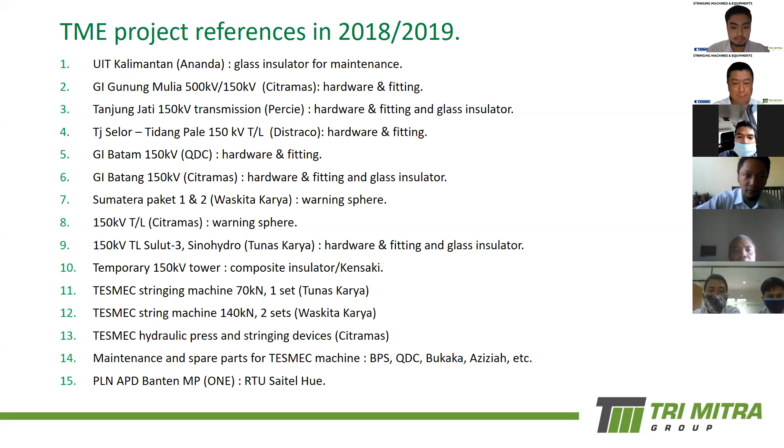Mesin-mesin stringing yang dibeli tahun lalu itu oleh Tunas Karya Ditama untuk tipe kecil, Waskita Karya 2 set untuk pekerjaan di Sumatera, di Citramas, dan perawatan-perawatan mesin. Jadi kalau dilihat di sini sudah cukup banyak yang sudah kita kerjakan selama ini. Terima kasih atas dukungan Bapak Ibu sekalian, semoga di tahun depan kita semakin bisa mendukung proyek-proyek Bapak dan Ibu sekalian.

Untuk mengingatkan offer-offer yang ada di kami yang kami wakili, untuk peralatan atau produk-produk transmisi, hardware fitting, dan insulator, kita memiliki Dervaux untuk hardware fitting, dari mulai tension string set, suspension string set, damper, spacer, dan lain-lain. Dan juga warning sphere dan warning light yang dibutuhkan untuk area-area berdekatan dengan penerbangan.

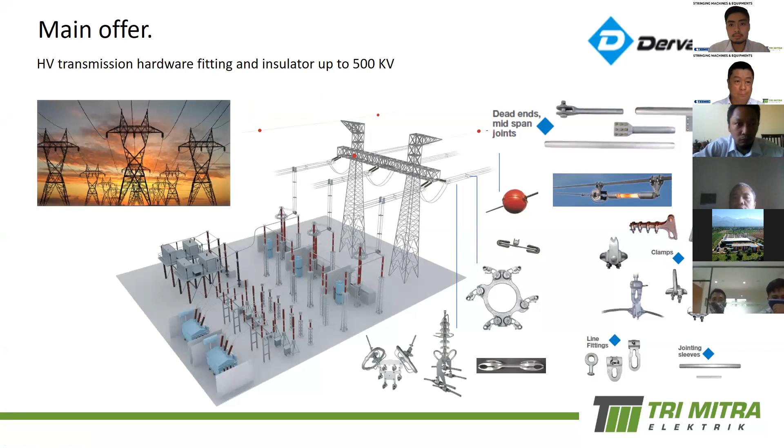Untuk substation gardu induk, kita juga memiliki dari Sicame Group dengan merek SBI. Ini segala jenis konektor yang diperlukan untuk gardu induk, diproduksi oleh kami di beberapa plant kami di Spanyol, di India, dan di tempat lain. Produk yang kami miliki itu lengkap sekali, sampai 500 kV.

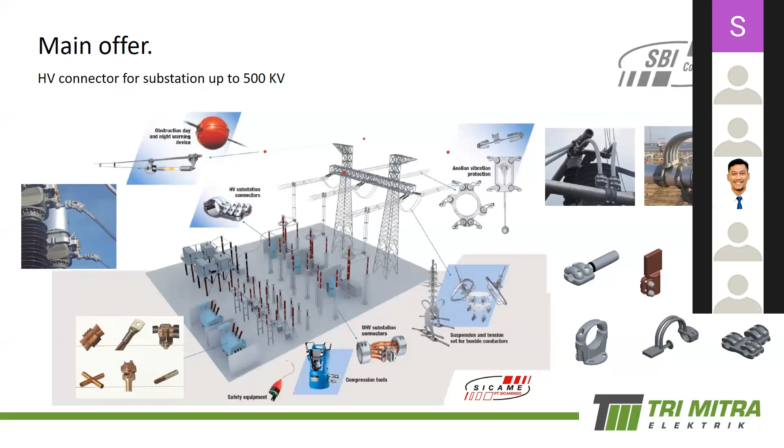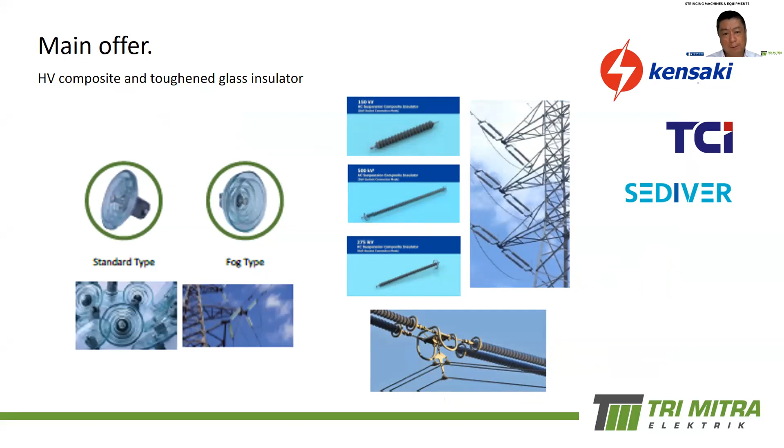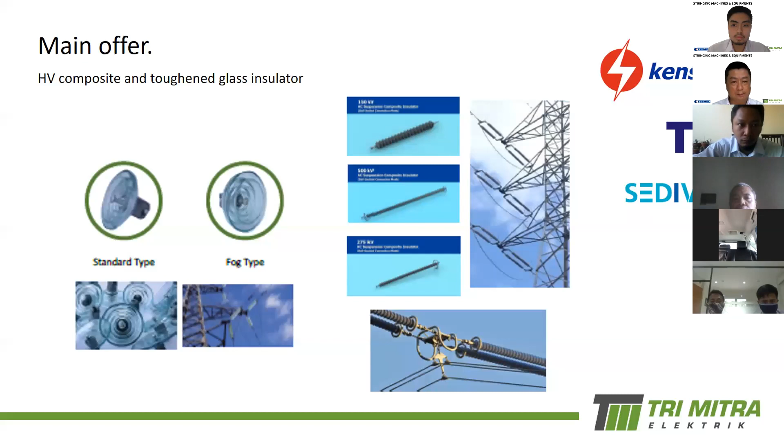Untuk insulator, kami memiliki semua teknologi, seperti Bapak Ibu ketahui ada 3 macam teknologi insulator, dari mulai keramik, toughened glass, dan komposit atau polimer insulator. Kita memiliki ketiga-tiganya dari merek-merek terpercaya. Untuk polimer atau komposit itu dari Kensaki, produksi Indonesia sepenuhnya. Untuk keramik kita memiliki TCI, dan untuk toughened glass itu dari Sediver, Prancis. Jadi lengkap sekali, apapun teknologi yang dibutuhkan, kami bisa mendukung proyek Bapak dan Ibu sekalian.

Pada hari ini kita akan dibawakan oleh tim dari TESMEC Italia langsung, offer yang lengkap untuk mesin stringing, dari puller tensioner ataupun gabungan puller dan tensioner, baik dengan teknologi yang paling mutakhir 4.0, dan juga peralatan-peralatan bantu seperti tirfor, come-along, pulling rope, mesin press hidrolik, dan bermacam-macam alat-alat lainnya. Nanti Bapak dan Ibu bisa juga download katalog lengkap kami di website kami.

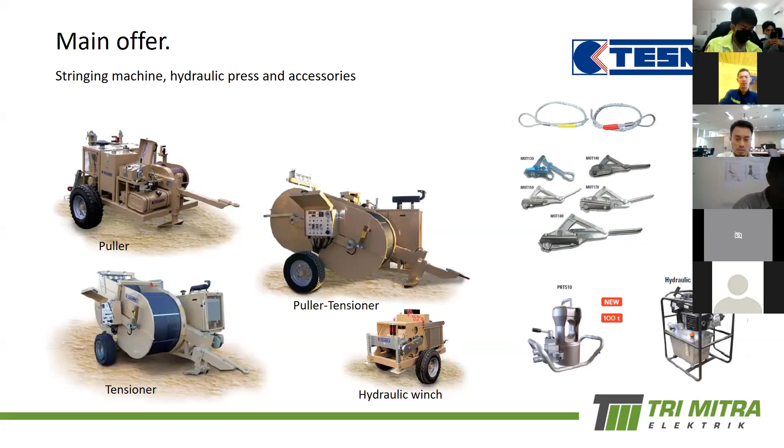Dan ini yang terakhir adalah untuk distribution automation untuk 20 kV. Ini untuk kebutuhan di gardu-gardu distribusi, dari mulai fault indicator, remote terminal unit yang sudah dipakai di beberapa tempat di APD, dari tipe-tipe kami Talus T300, Saitel, DP, dan DR. Ini produk dari Schneider Electric.

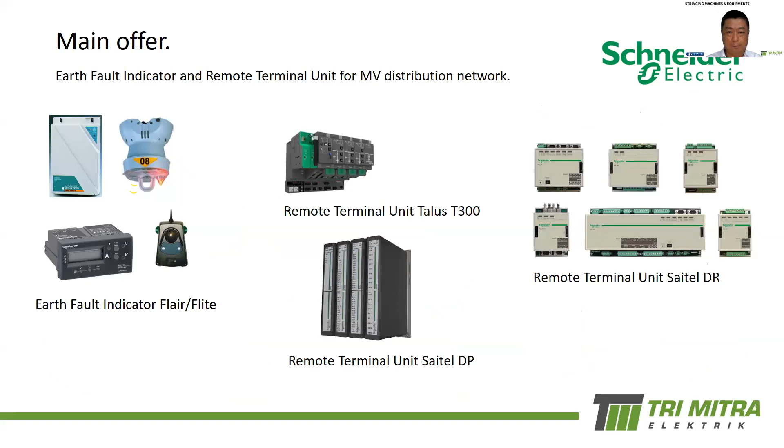Demikian penjelasan sekilas mengenai Trimitra Electric, apa produk yang kami wakili, yang kami representasikan, dan kepada siapa mungkin Bapak dan Ibu bisa berhubungan dengan tim kami, baik tim sales maupun tim technical. Kalau ada informasi yang diperlukan bisa mengunjungi website kami www.trimitraelectric.com. Demikian penjelasan dari saya.

Mungkin kesempatan berikutnya kita berikan kepada rekan saya Amos dari TESMEC Italia. Silakan Pak Alvin.

Terima kasih Pak Rianto. Jadi yang akan mulai ini Amos Carrara, sales manager, sales area manager, dan juga Mr. Gianluca, yaitu sales director dari TESMEC langsung. Untuk mempersingkat, saya perkenalkan Amos.

Halo Amos, are you there? Yes, I am, Alvin. Good afternoon to all of you. It's a big pleasure for us to join you in this very interesting webinar, I hope. Due to the circumstances, I cannot be there because of the restriction of COVID, which is an experience that you're having as well. But I think that thanks to this event organized by our partner from Trimitra, we are able to give you an update of all our solutions from a stringing equipment point of view.

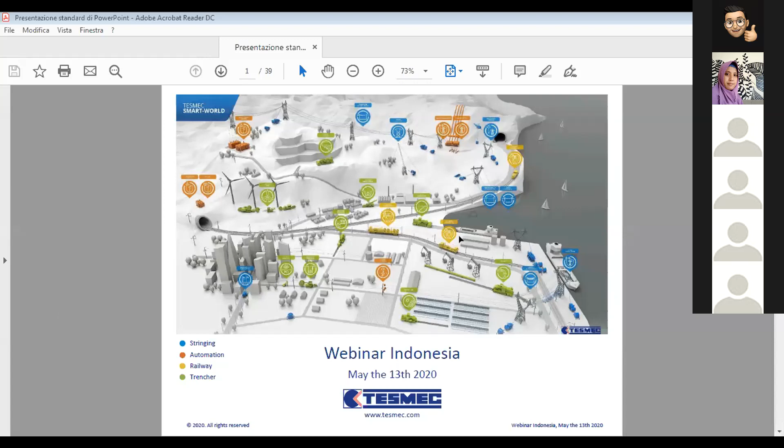We are a company based in Italy, existing for more than 65 years. And we are increasingly becoming a solution provider rather than just a manufacturer of products. Okay, I will go fast.

We have 4 business units. Stringing is one of the 4, and the historical business unit of the company. We have the railway division that is fast growing in the last few years, where we manufacture machines, equipment, and solutions for catenary installation and maintenance. We also have an automation division, a small division for grid management devices, for telecommunication and so on. And the trencher division, which is at this stage our biggest division in terms of turnover.

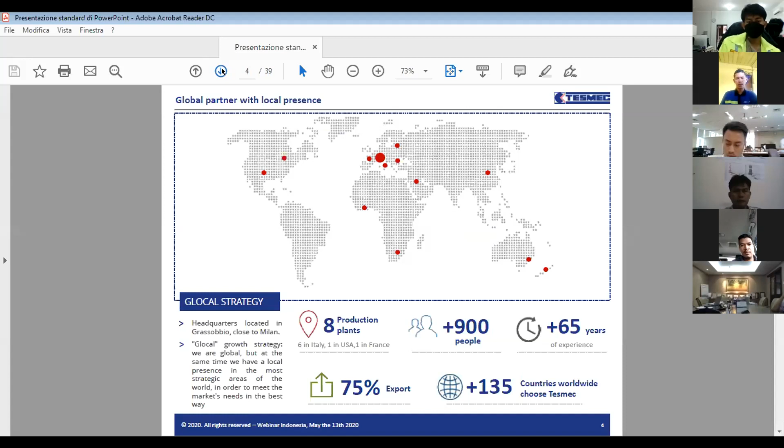We have 8 production plants all over the world, even if mainly in Italy. We have 5 production plants in Italy, maybe 6, and 1 in USA, 1 in France. We are close to 1,000 people nowadays, and as you can see from these numbers, our focus is mainly overseas, on export.

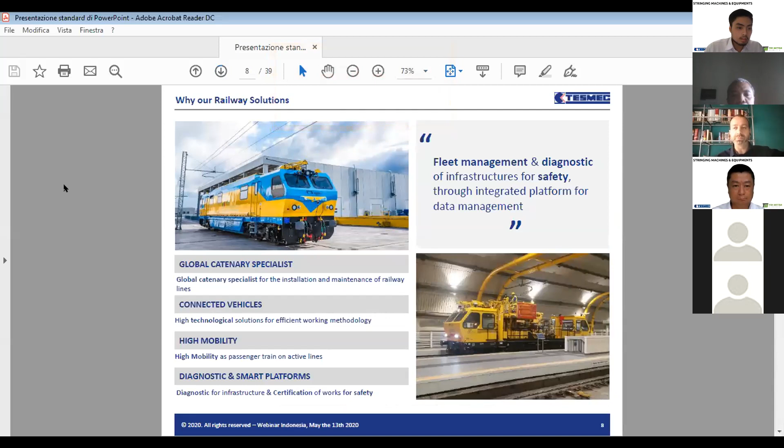Can you see my desktop? Can you follow? Okay, yes.

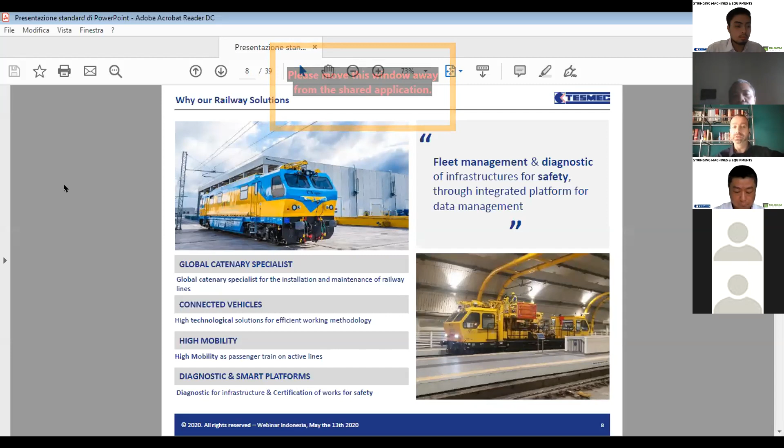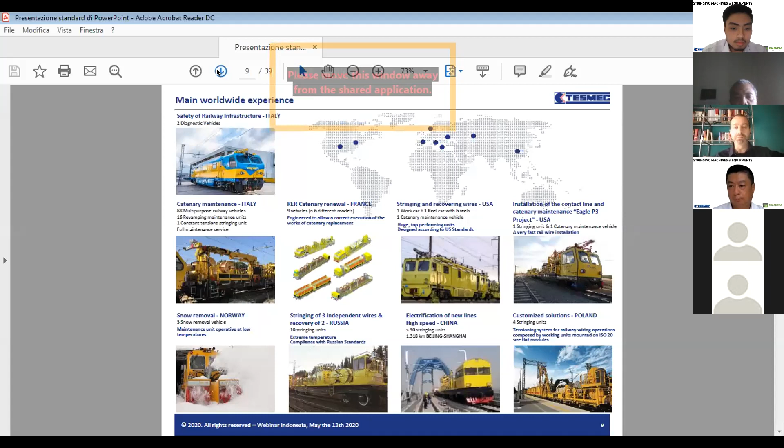The railway solution is very important, very much related to stringing, because it started with stringing equipment for the railway. It is born from the same technology of the tensioners, the puller tensioners, like for overhead lines, also for the railway. But from there, historically part of our manufacture, since 7-8 years now we have a big range of equipment with very different machinery for maintenance, for diagnostics, and for many other activities than only stringing. You see there are some examples of equipment and main projects in several countries.

The trenchers. The trencher is a range of machines that we produce here in Italy and in USA. We can say there is a main production of hard rock trenching equipment that we have historically, merged with a company called Marais from France, where the orange color machines, by the way, are more let's say urban, for cable and fiber installation, and where we also have service ability in a few countries where we give this technology on a rental basis.

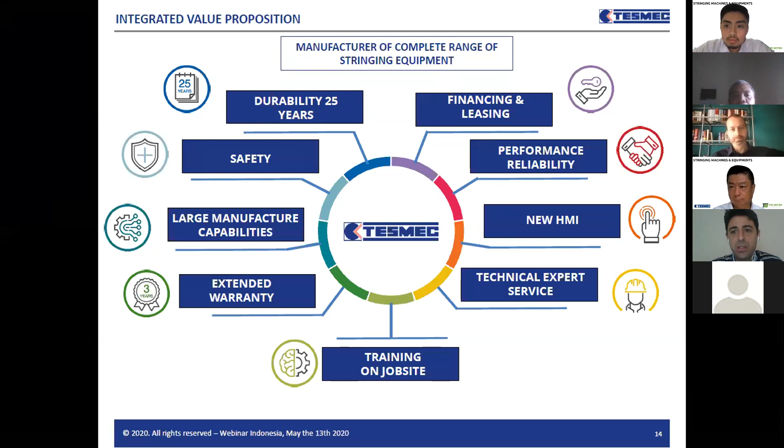So that was a revolution. Tesmec was the first one taking care of that. We got the patent, we got the leadership, and thanks to that, we then developed our experience, making the machines more and more sophisticated and performing. So you see moving from the pure mechanical, then to hydraulic, then starting from the 2000s we put in electronic components, making that step by step more and more technological, until now we've gotten to what we call machines 4.0, which is the last step of our evolution. We'll give some information about that in the next slide.

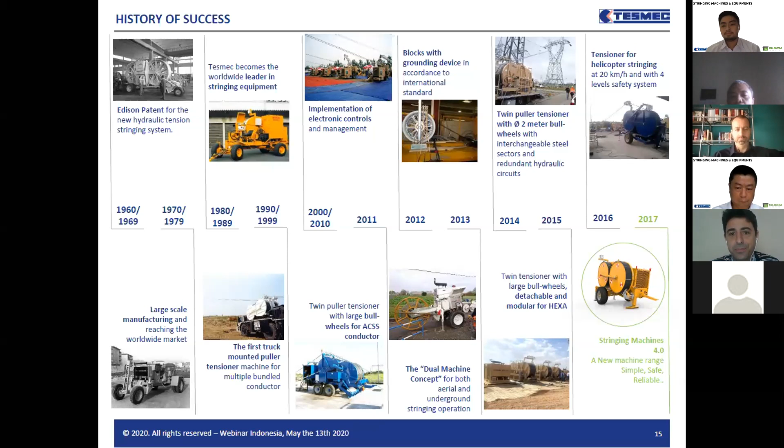All our machines and equipment take into consideration the guidelines, prescriptions, and standards which are given by the major working groups worldwide.

Probably the most important one, I would say the most important one, is the IEC, which stands for International Electrotechnical Commission. The working group specifically dealing with stringing equipment is the 61328. We have the great luck and pride to have our chief engineer being part of the working table defining all the prescriptions and standards, so we are very aware of the technical specifications required to be in compliance with this.

I take the occasion now to introduce Mr. Alberto Oscar, who is our chief engineer, who can give some quick points about the key factors which make the machines compliant with such prescriptions. Alberto, would you like to give two or three quick references?

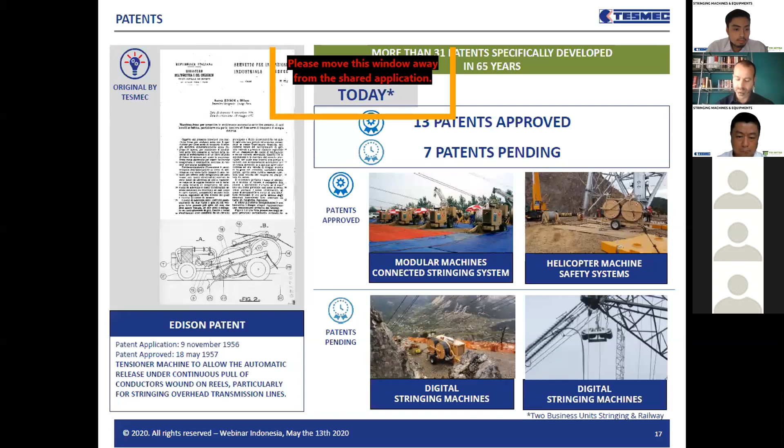In particular, Tesmec introduced the modular machine concept, with an approved patent. Tesmec also introduced to the market the helicopter machine, a tensioner that can work with a helicopter acting as a puller at very high speed, up to 20 kilometers per hour, for example. Tesmec also has some patents pending, for example on the new concept of the roller, the pivoting array block featured in the new catalog, and on the digital stringing machine. So Tesmec is very involved in research and development, and in registering and protecting know-how all over the world.

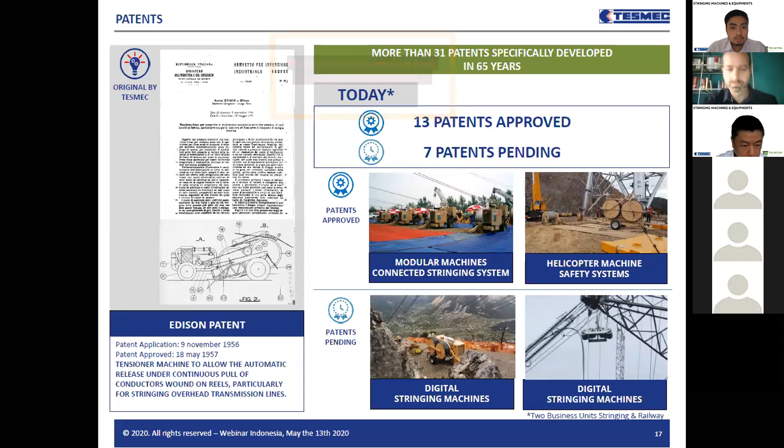Okay, during the next slides there will be other technical points, so I will step in when needed. Yeah, Alberto can jump in anytime he deems fine for further explanation.

If you want a bigger vision of this catalog, our friends from Trimitra can provide it on soft copy and on paper copy as well.

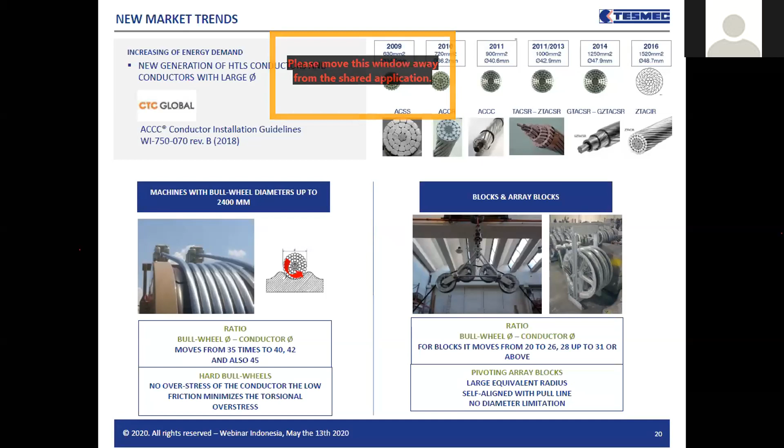Thank you, Amos. Just talking about CTC, then we'll move quickly. CTC has in their range a conductor called the Monte Carlo, which is 21.78 millimeters, if I'm not wrong, with the carbon core Alberto mentioned. The requirement from CTC is to have the bull wheel diameter 70 times bigger than the carbon core. I don't remember the specific dimension of the core itself, but in the end, the minimum bull wheel diameter came out to 1.78 meters. This is just an example to show that the world is probably heading that way - new conductors are coming and the machines and equipment must follow, and we are ready for that.

We know that Indonesia has already had some experience with ACCC conductors. We are ready for that. So should this become the way forward even in Indonesia, we have the machines, rollers, gripping clamps, and sock presses. We are aware of all the specifications required to satisfy these needs.

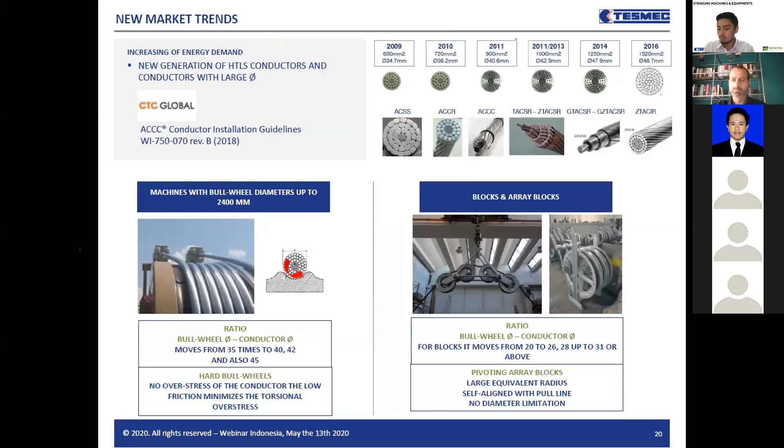But still you had some requirements for the reconductoring, because I'm aware that the PLN is in any case replacing some old conductors with new ones. So this could be a great solution to cut dramatically the time needed to finish the job. According to our simulation and according to the partnership we had with National Grid, which is the PLN in UK, we can say the time saving can be up to 40% compared to the traditional solution.

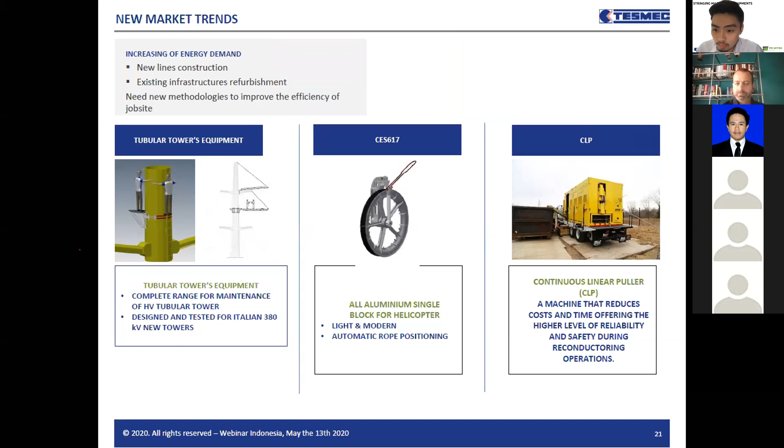The most important benefit of the continuous linear puller compared to a traditional puller tensioner is that when a mid-span joint arrives in front of the machine, the CLP can manage it directly and cut it with the cutting module, while in a traditional puller tensioner the mid-span joint has to be cut and removed in front of the machine—an operation that requires anchoring the conductor, cutting it, removing it, installing mesh joints, passing over the conductor, removing the mesh joints again, recovering them, and restarting the operation. So the 40% gain in reconductoring time is basically related to the fact that every mid-span joint, repairing joint, or dead anchor tower bypass that arrives in front of the CLP can be managed without a stop.

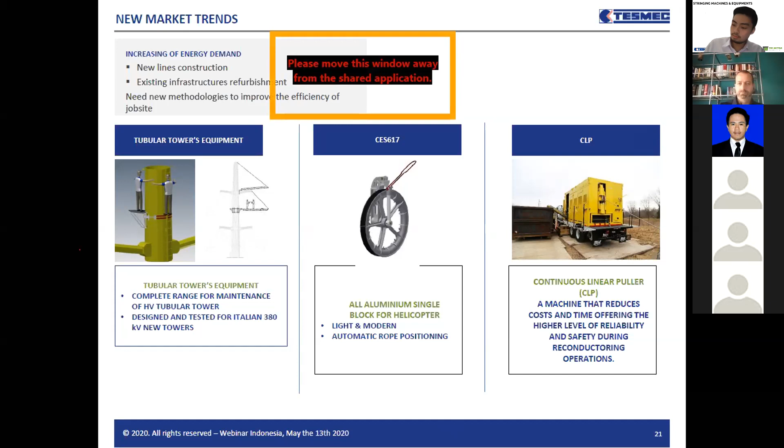Yes. What is this slide about?

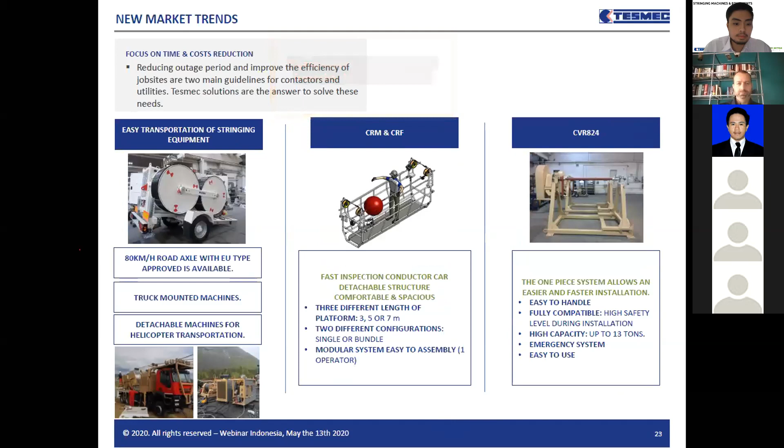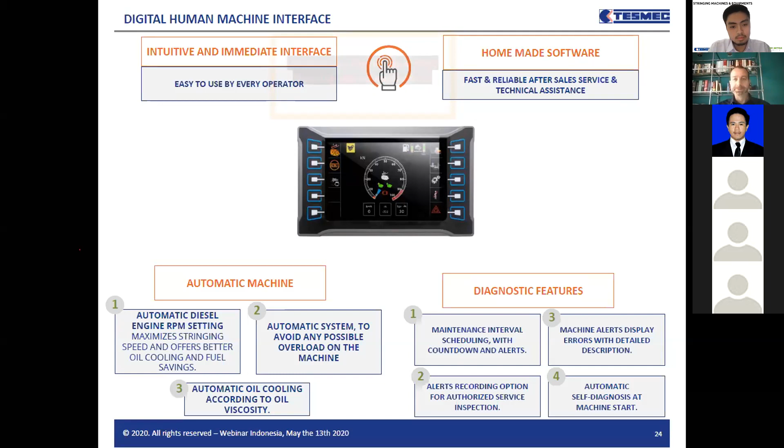It is extremely simple to use, and the machine has a lot of automatic systems to avoid mistakes, to increase safety, and also to have a full diagnostic of the machine itself on board, and also remotely if required, by a system that we can install on the machines.

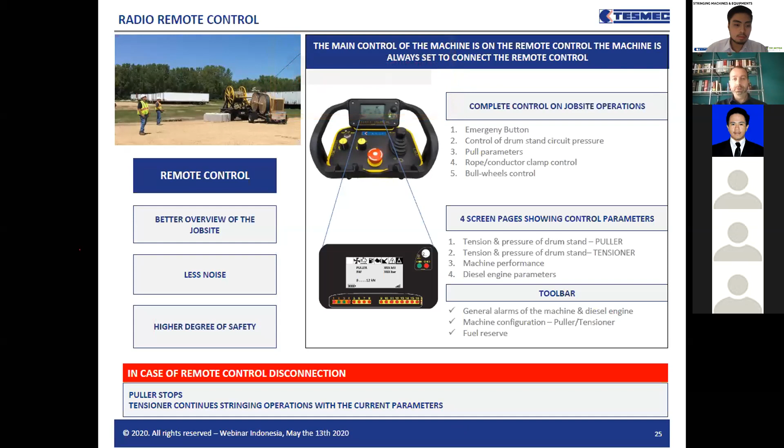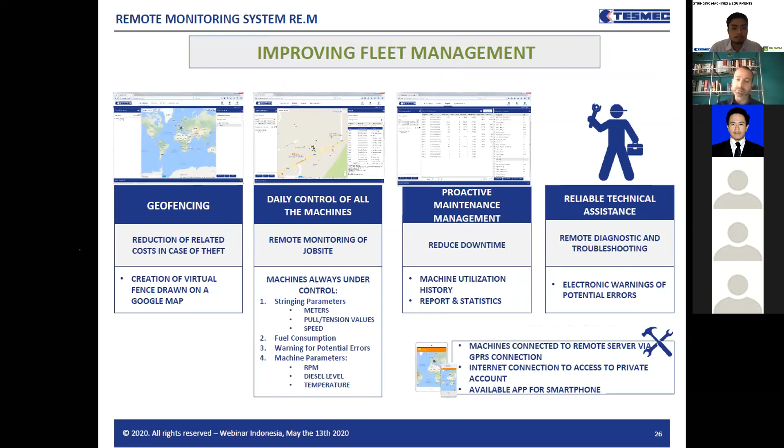The fleet management is what we call the remote monitoring system. It's a system on board the machine that, with GPRS, is able to gather all the information from the machine—stringing information, data—and send it to a cloud accessible by the service or by the customer, the owner of the machine, who can access all this information: geolocalization of the machine, control of the machine, maintenance, and proactive maintenance.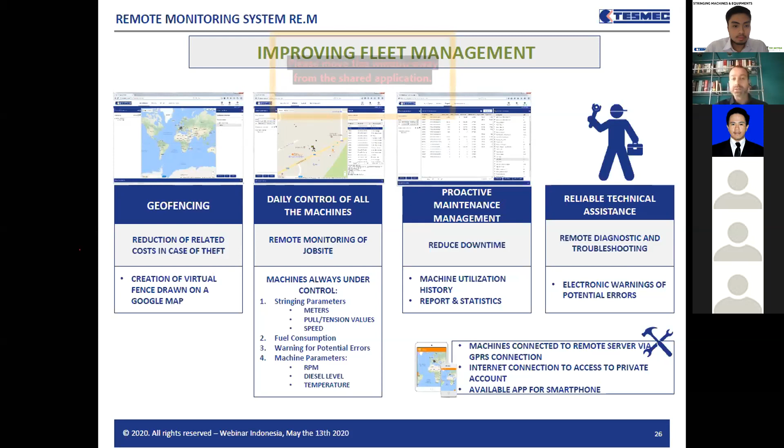It's also a very reliable service for the machine, where we can predict if there could be a problem on a machine to avoid stops on the job site. So this is a new way of managing the equipment and the fleet, in case a company has many machines. This system can also give weekly reporting, for example, of what the machine has done. So it's really a much more modern way to manage this equipment.

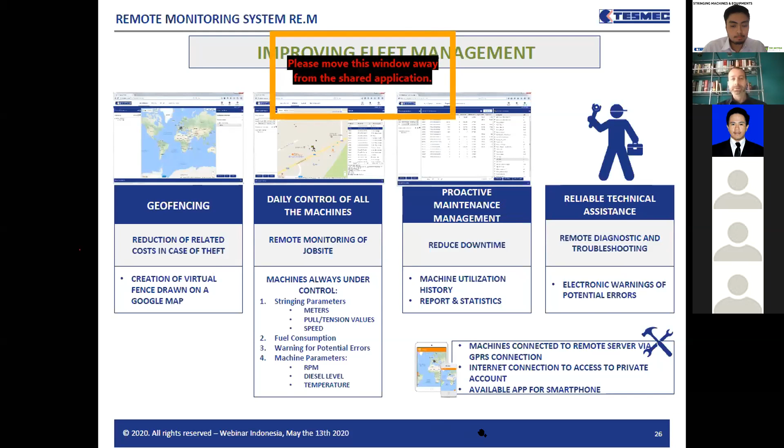Yes, Gianluca, we can say it is a revolution basically, because it is providing a more safe approach. So the new system is able to guide the operator in a much better way, minimizing the risk of any wrong operation being taken. It is providing more information, but more than that, it is providing a different way to show the information, making it clearer so operators, project managers and people know in advance what is happening, thanks to remote monitoring. With remote monitoring, you can see everywhere you are with a laptop, smartphone or tablet what is happening, provided there is coverage with the signal. So we can say it is a really big revolution in the approach to fleet management.

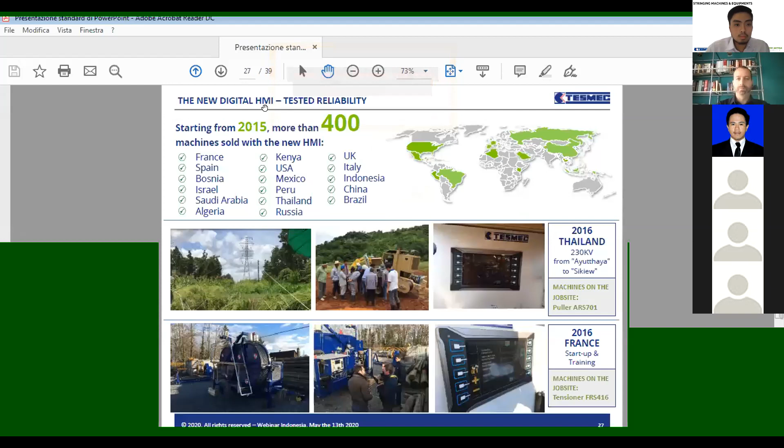We already sold hundreds of these kinds of machines everywhere, in Indonesia as well. It is becoming more and more required. Of course we still have the standard range, so we are not killing the previous machines, which are still available, but the new machines are becoming more and more a standard. You see here in the slide a few examples of the countries we sold these machines to.

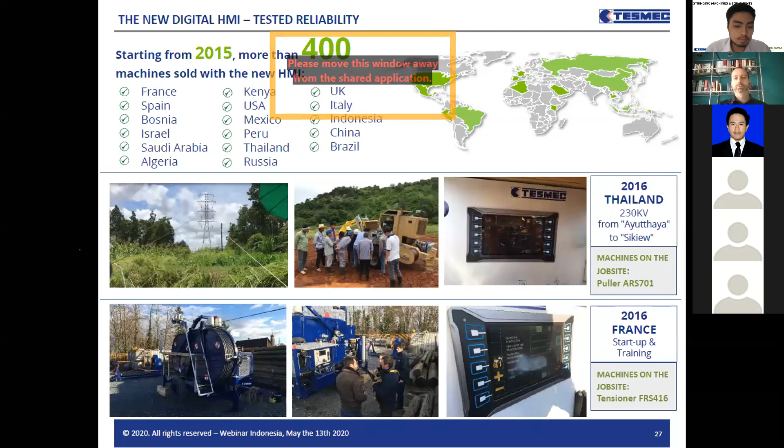We started in 2015 with pilot projects, Thailand and France, a few of them. We saw the results, which were very good. The reliability was excellent. The panel is not touch screen, because touch screen is not fully reliable. So at the end of the day we chose to go with a plastic button, high resistance one, as we saw that the touch screen was not, at that time, fully compliant with the humidity, the dust, etc. So we push on that, and we believe this year it will become the standard in the very near future.

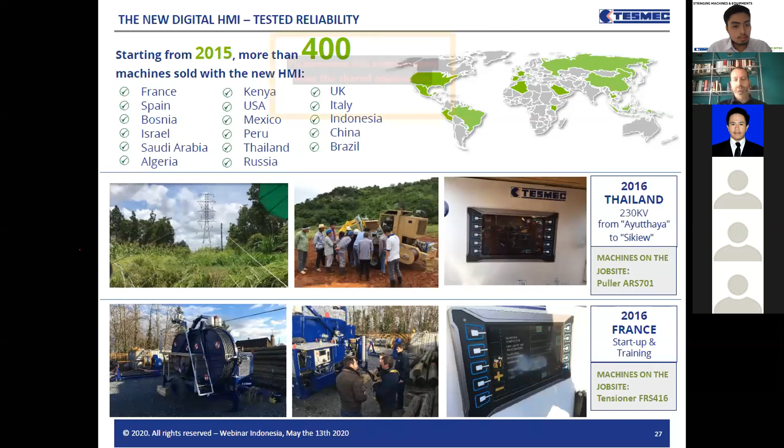Okay, I think we can go quickly here in these slides. After sale, this slide is about our partnerships, also all related to the R&D that we already gave some information about, what we do with technical committees like IEC and universities and so on. So I would go fast here.

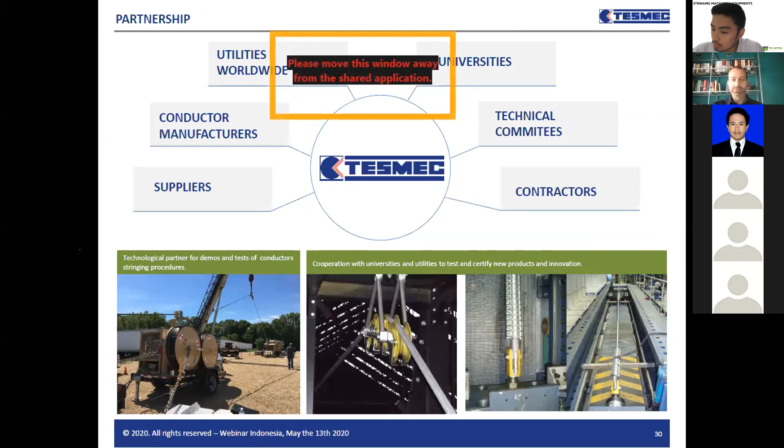Some experience also here, many experiences all over the world, because we are selling equipment in more than 100 countries. So of course we get information and feedback from very different countries and different conditions, and this is also a strength for us to design equipment that is able to work in any kind of condition.

For that reason, we have started testing this new 4.0 technology for 5 years, because we want to be 100% sure of the reliability of this system. We cannot put something in the market without knowing that maybe after 6 months we'll start having problems. So this is our mentality. We have tested this equipment in all different conditions to be sure it was extremely strong.

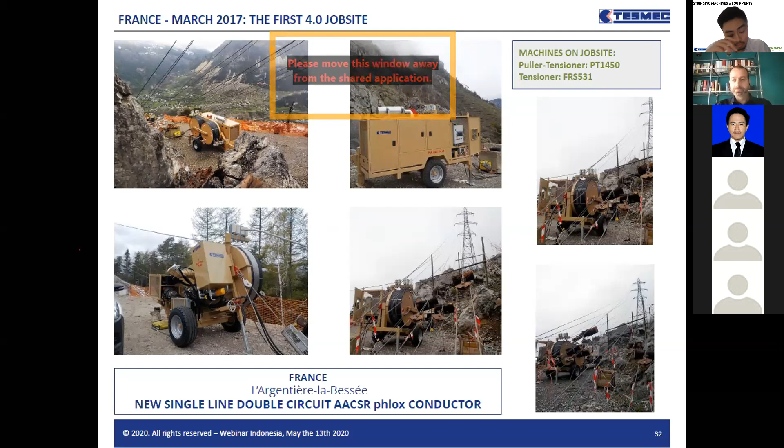Gianluca, maybe it is good to say that in our statistics, we see that our machines normally last 25 years. In many situations I saw machines much longer than that. I remember with our friends from Dalekovod in Croatia, they still have machines coming from the end of the 60s, but it is not so unusual to see machines still working from the 70s. But okay, let's take 25 years.

Our new 4.0 machines surely will not suffer any degradation of this number, because the components are still coming from the same technology as our previous machines. So the big difference of these new machines is just how the information is provided. There is more information because there are more gauges, more data acquisition, but the real revolution is how the information is provided. And this is not suffering any critics, I mean no sensitive point in addition to what we saw so far. So please don't connect this 4.0 concept to a more critical way of reliability or durability, because this will have exactly the same performance as our standard machine.

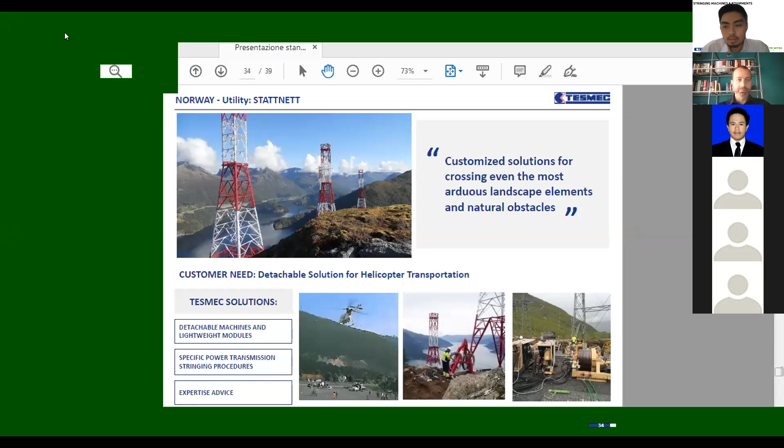Just to be a little bit more detailed, in the right bottom side you can see a 16-ton puller made basically of 5 different parts that can be transported by helicopter. The 2 bull wheels can be transported separately, so they can be easily dismounted. The base frame and the power pack are divided into parts. Everything can be reassembled using just the helicopter as a sky crane, a flying crane. You don't need any crane on site to do this operation.

We have 2 more slides before we get into the Q&A. This is another project with our utility here in Italy, but I know we are very late, so we can go directly to the Q&A if you want. I believe just two free slides about Indonesia.

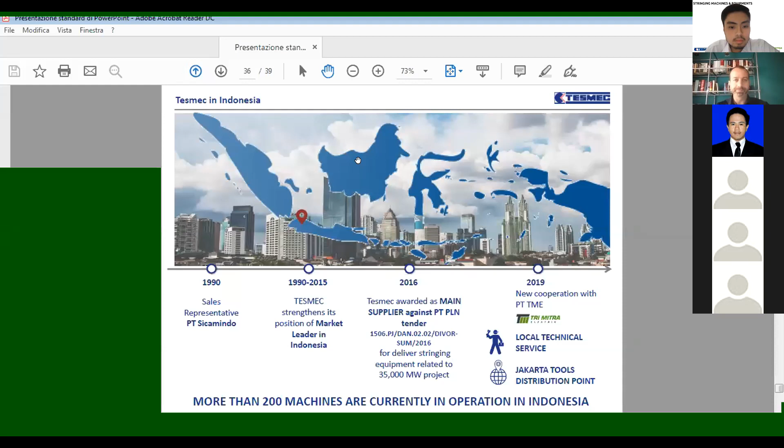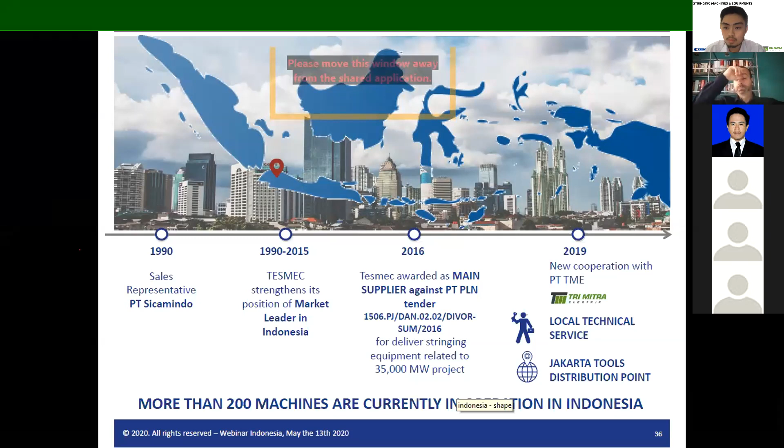Go back to the previous slide showing the green screen. This is the history of TESMEC in Indonesia. We've been there for a very long time. We start here in the line with 1990, but with our machines we were there even before - in the 70s and 80s, when contractors were mostly foreign ones, like ABB, Siemens, whatever. They brought our machines there.

1990 is the year where the market opened to local contractors - for example Balfour Beatty, Sakti Indonesia at that time, Bukaka at that time, and slowly many others came. Starting from that point, as TESMEC we jumped there with our local representative, who for a very long time was Sicamindo, Mr. Sukanta Sutardi - I'm sure you all know him. Thanks to his support and our effort, we reinforced our leadership in Indonesia for a long time.

We got the peak of performance thanks to the PLN project, part of the 35,000 megawatt acceleration project. PLN purchased a big quantity of stringing equipment in November 2016. As TESMEC, we provided 25 sets out of the 40 they purchased, which was a very big honor for us. Thanks to that, our presence in Indonesia is even stronger. At the moment we have around 200 machines currently in operation over there.

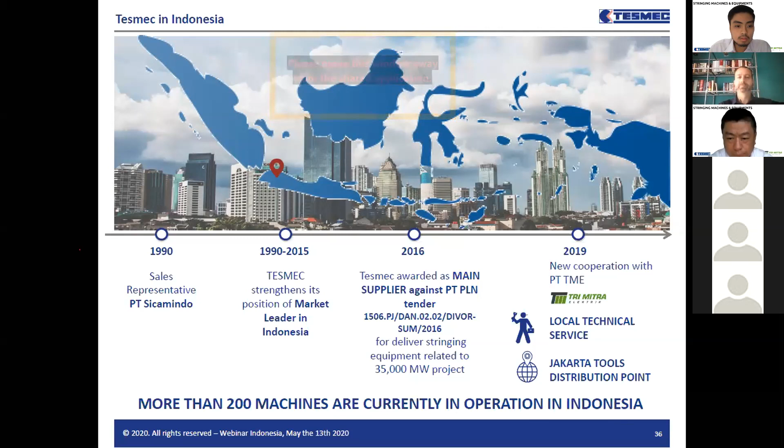In 2019, with great pleasure, we started our cooperation with our friends from Trimitra, with Pak Rianto and Pak Albin, when our friend Pak Sukanta decided to retire. Thanks to him for his good cooperation. Now, thanks to what we did so far, we are much open and very ready to face all new challenges from Indonesia, which is a big market, a booming one. You are building networks everywhere.

Next slide please. Thanks to the PLN experience, we showed our capability to provide a big quantity of machines and equipment. You see here a few pictures from that experience, of machines and pulleys. It was 25 sets, each with 160 pulleys, and each set had 40 or 50 kilometers of pulling rope. We were able to satisfy PLN's very challenging requirement to have machines and goods delivered in 210 days, basically 7 months. We were able to cut the delivery time by 50%.

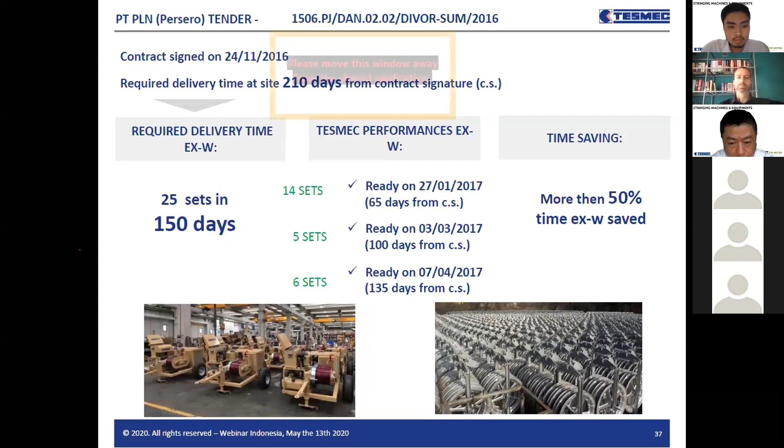So we gave proof of our capability to satisfy these big inquiries in very short time, thanks to our manufacturing department, which is a really huge one, with 8 manufacturing facilities of our group worldwide.

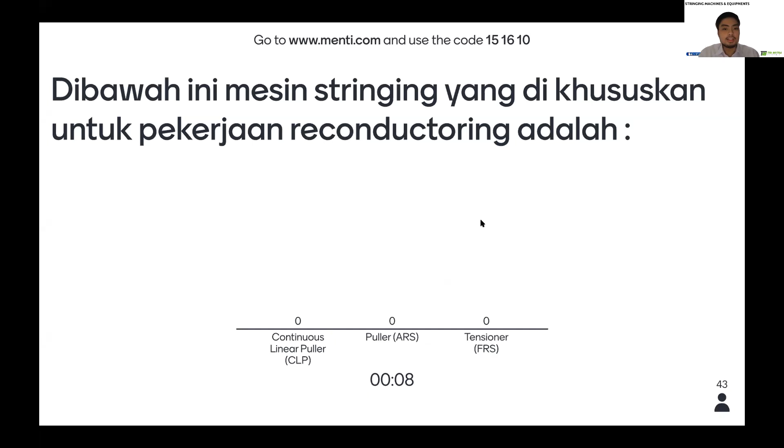Jawaban yang benar adalah continuous linear puller. Itu dikhususkan hanya untuk reconductoring, ada 4 mesin dijadikan satu. Jadi konduktor lama ditarik, kemudian langsung nge-string konduktor baru sekalian memotong.

Ada misalnya mid-span joint-nya dan lain-lain, sekaligus di dalam mesin linear puller. Kita lihat leaderboard, nomor 1, Pak Murdiono. Ini semua bedanya cuma 10 poin, nggak nyampe. Masih bisa dikejar semua ini, 5 pertama.

Pertanyaan berikutnya adalah, di bawah ini yang terdapat pada teknologi 4.0 di digital stringing machine adalah human machine interface, remote control unit, GPS system, atau semua benar. Tadi saya juga sudah menjelaskan mengenai 4.0, apa saja fitur-fiturnya di mesin baru, mesin stringing baru dari TESMEC.

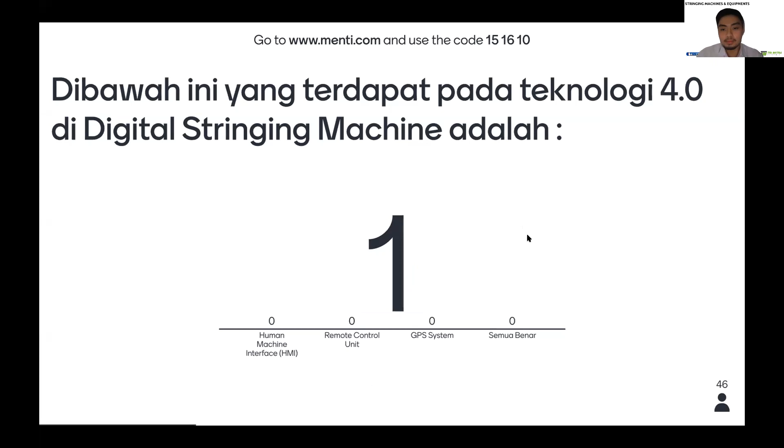20 detik lagi, kita akan melanjutkan ke pertanyaan berikutnya. Ingat, ini poinnya yang menjawab terbenar dan tercepat yang akan mendapatkan skor lebih banyak. Benar, semua ada di dalam mesin 4.0, GPS maupun remote control atau HMI semua ada itu di 4.0.

Nomor 1 Pak Arya. Wah, Pak Arya nomor 1. Tapi ini cuma bedanya 10-20. Masih bisa dalam pertanyaan berikutnya. Masih bisa dikejar.

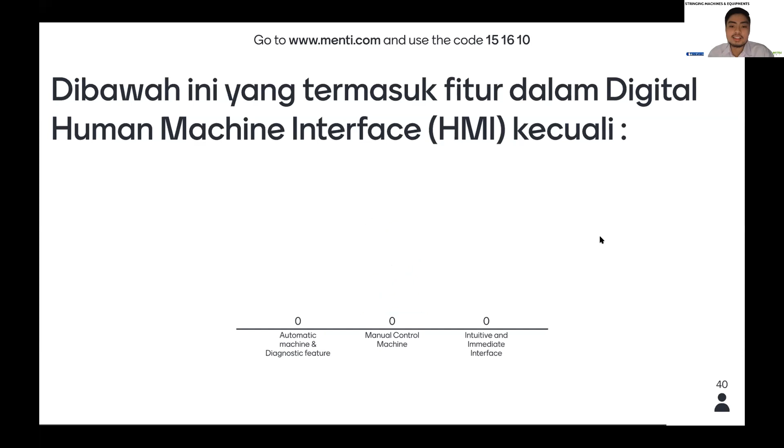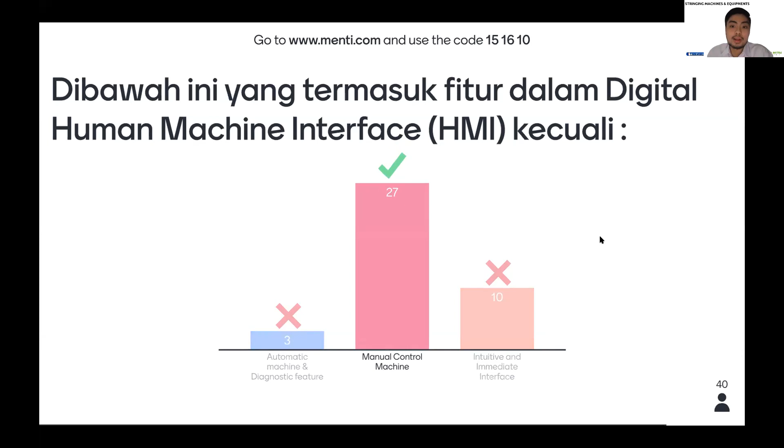Nah, ini sedikit trick question bagi Bapak-bapak, Ibu-ibu yang menjawab ini harus benar-benar baca satu-satu, karena kita tidak bicara mengenai HMI tersebut hanya sekilas. Masih jauh. Betul sekali, manual control machine. Itu di HMI tidak bisa, ini manual, karena itu semua otomatis di dalam HMI tersebut.

Oke, kita lihat pemenangnya. Pak Arya masih nomor 1, kemudian kedua Pak Oktariko, ketiga Pak Pranoto, keempat Pak Anwar Sidik, kelima Pak Rahmat Pratama. Nanti akan kami hubungi Bapak Ibu melalui list registrasi.